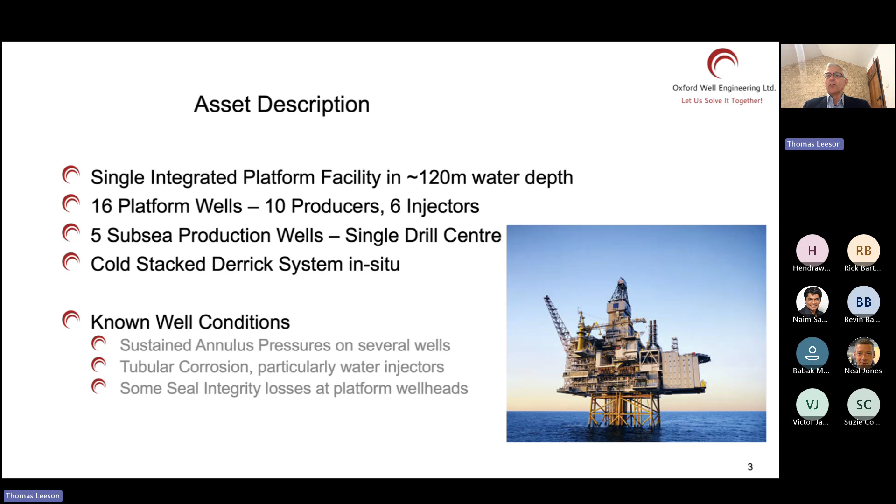And of course, if this is typical for platform wells, one of the things we should be thinking about, well, even if we don't know for certain what's in the subsea wells, do we have any reason to believe that it would be different than what we're experiencing? Of course, it might be. Your metallurgy might be different. The reservoir you're dealing with might be different. But oftentimes the problems that you see with platform wells, we will see with subsea wells as well. We just don't know it yet because we haven't got access to the well.

When we start a project, what have we got? Well, actually, what we should already have is a liability estimate, or what's sometimes referred to as an asset retirement obligation estimate, an ARO. This is a legal requirement because we have a known cost in the future. We know we are going to have costs associated with the decommissioning and abandonment of the field, and therefore the company that's responsible for that must carry that liability on its balance sheet. So we need an estimate of what that liability might be.

And so typically what's done is a simple deterministic estimate. I don't think I've ever seen all the wells reviewed at this point. It's usually a selection of the wells. So for our 16 wells plus the subsea wells, in this particular instance, there were 4 wells selected for a superficial review to come up with a conceptual design of abandonment that we can then put a most likely duration on, and we can have some most likely or reasonable unit costs associated with those activities.

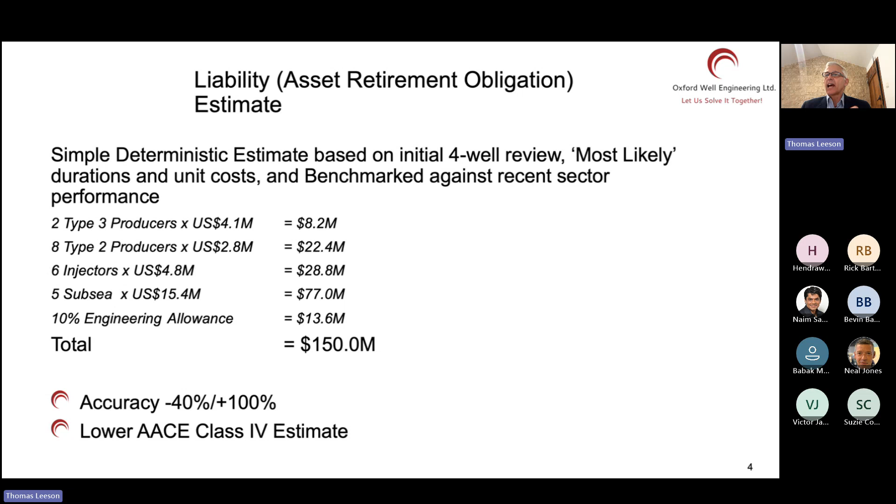So we would still use AACE's recommended practices, and we'd use their template for basis of estimate. But to do a project budget, we really ought to look at each well. Clearly, it's the start of the project. We won't solve all the problems. We won't even identify all of the problems, probably. But we should at least have a look at each well. And as we do it, we should prepare a really comprehensive technical risk register. Every time we have an unknown or an uncertainty, we have an additional technical risk. And we should recognize that, and we should understand what it is we're going to do if that risk turns out to happen, if that unknown or uncertainty and the assumptions we've made around those are wrong.

What are we going to do? And typical things we're talking about: what about when we start circulating and we get losses? What about if we go looking for the cement behind the casing and it's not where we thought it was? Or maybe it doesn't even have a seal. So these types of things that we don't necessarily know until we get into the well, we really need to recognize. This is absolutely fundamental to getting lowest cost.

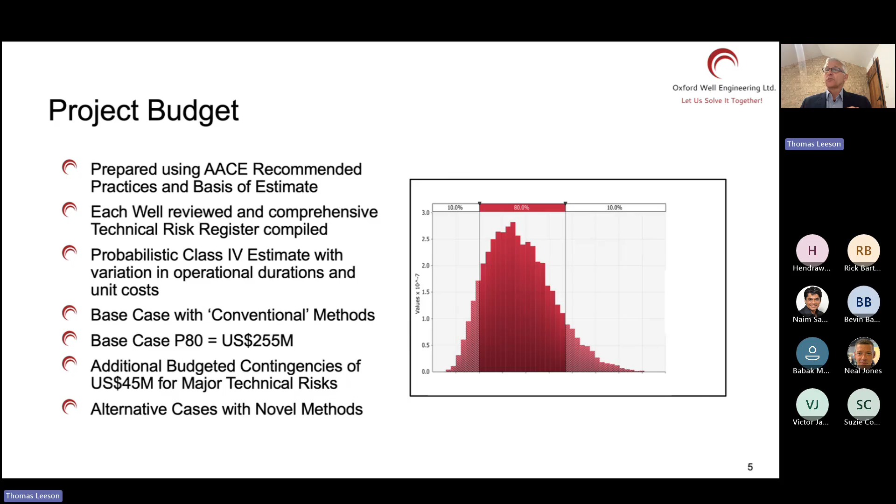While we're doing this, we start to recognize what the alternative cases are that we might be able to use for abandonment, and what novel methods we might be using, but we wouldn't include them yet in the project budget. If we look at the well delivery process, where we're going to go through our gated process, typically assess, select, define, and then execute. This is Oxford Well Engineering's summary of their process.

What I would say, there's two key factors, particularly for well abandonment. One is we should go talk to our regulators. We need to understand what our regulators' expectations are in terms of what the barriers look like and how they'd be tested, how they would be verified, how open are they to us using new technologies, and what extra assurance might they want if we were to do something like that. We need to be very comfortable that we've got a full understanding of their expectations before we start getting into designing the concepts in any sort of detail. So this is an action to take up very, very early in the project.

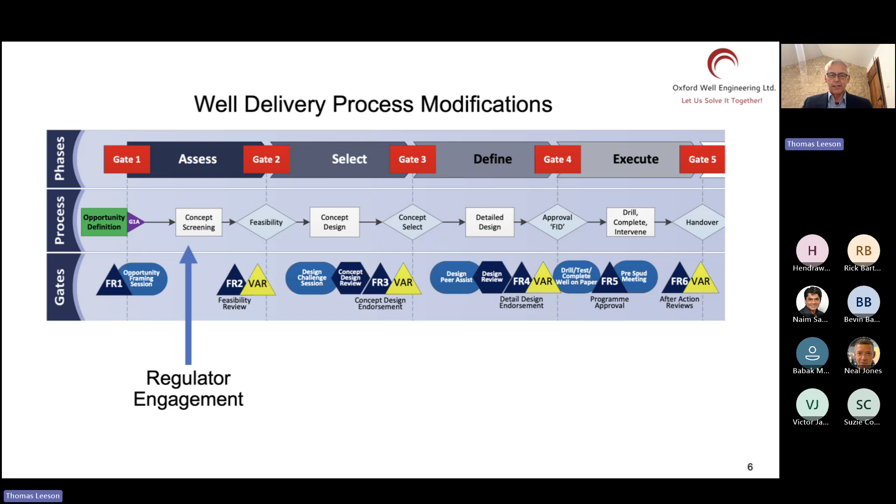In addition, I'd say in my experience, having an independent compliance review when the detailed designs are done is also an absolute key step in the process. There are some areas in the world where this is done with the use of a well examiner, so this is already integrated into the process. But that's not true elsewhere in the world, and I would strongly recommend that people consider this. This is the way to make sure you are compliant.

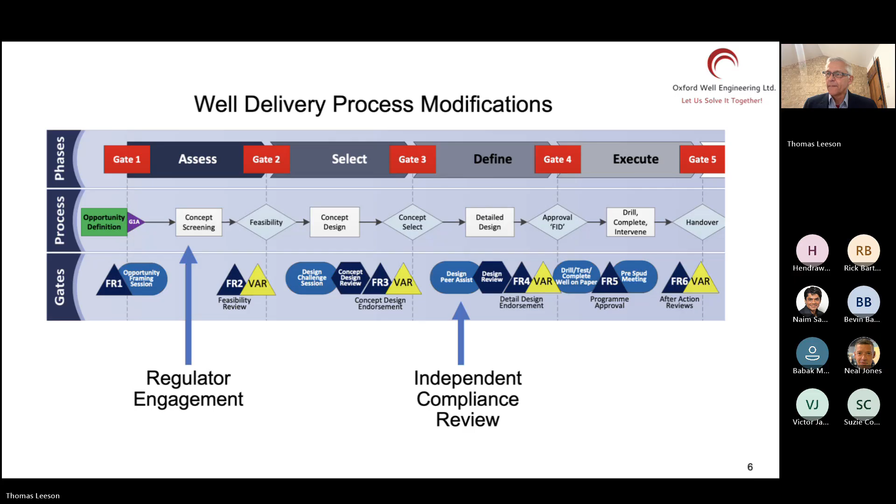But we have to ask, compliant with what? Because in many instances, the regulators do not define prescriptively what is expected, which is good because that means we have flexibility, we have opportunity to take different approaches, to deal with different challenges differently. That's what we want to do as engineers. But then it says, well, how do I know I was compliant? So we have to have a standard. We have to have something to work against.

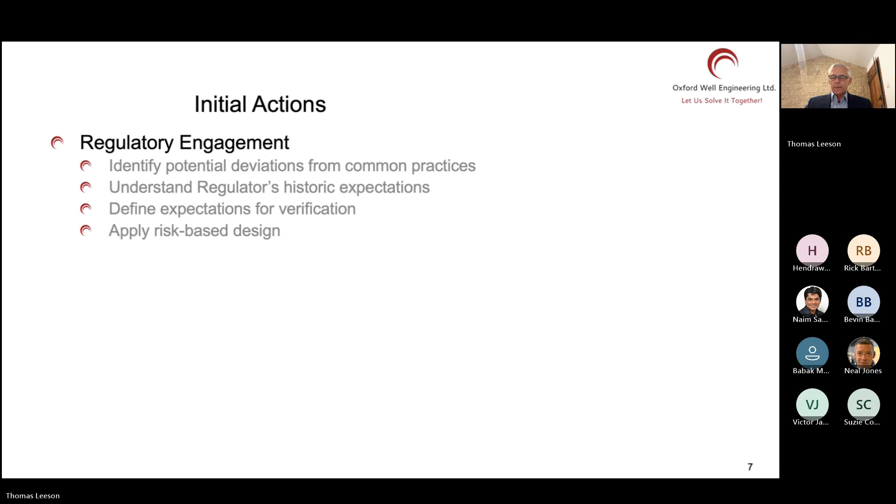And so our initial actions are that regulatory engagement, confirm what I refer to as an abandonment philosophy. We could call this a technical standard, but I don't think the name of the document is really important. What's important is what's inside it. And the key thing that we need to do here is define what barrier options are allowable. What do we consider to be good practice, and are there limits on the applicability of certain options? Can we only use them in certain circumstances?

We also need to confirm how we are going to verify our barriers. So are we purely going to pressure test? Let's say, for example, we put cement in the well. Are we just going to pressure test the cement? Or are we going to collect more information? And of course, that becomes particularly important if you're talking about new and novel technologies and methods, because you want more confidence in them, and therefore you need more verification.

What I would say as well is that at this point, you've also got the opportunity, and I've seen this done very well, to incorporate what I call a risk-based design approach. So if we compare two wells with very different risk profiles, there's an argument to say that for the more challenging well, we work to a more rigorous standard. Now, there's some question marks about that, because you would say, well, why don't we work to that standard all the time, if this has to be as low as reasonably practicable in terms of the risk of loss of containment.

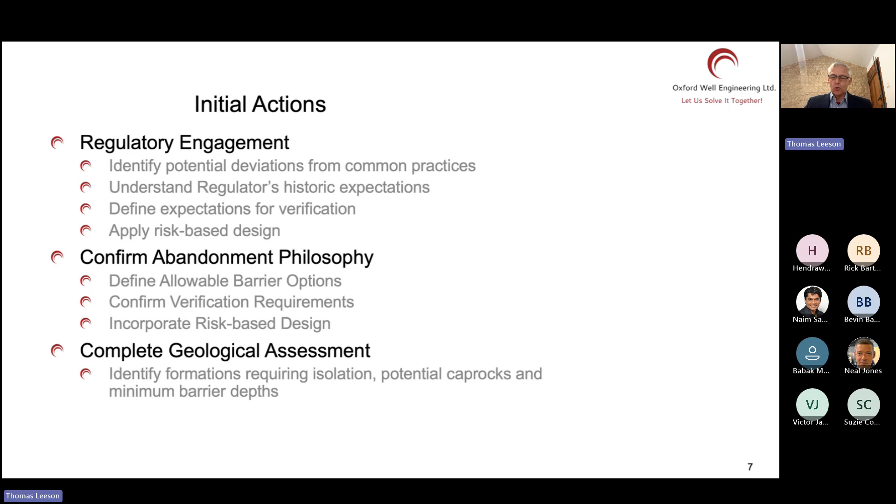And finally, what we should be doing is making sure that we've got a pore pressure plot so that we understand what pressures may be seen in the wellbore. And that then allows us to determine minimum barrier depths, so our barriers are deep enough that the formations opposite the barrier are strong enough, they have enough integrity to manage the pressure differential that they may see in the future.

So very important steps to get that in place first before we start looking in the well and start worrying about, well, do we have cement here? Do we need this there? This is the basics. This is where we start.

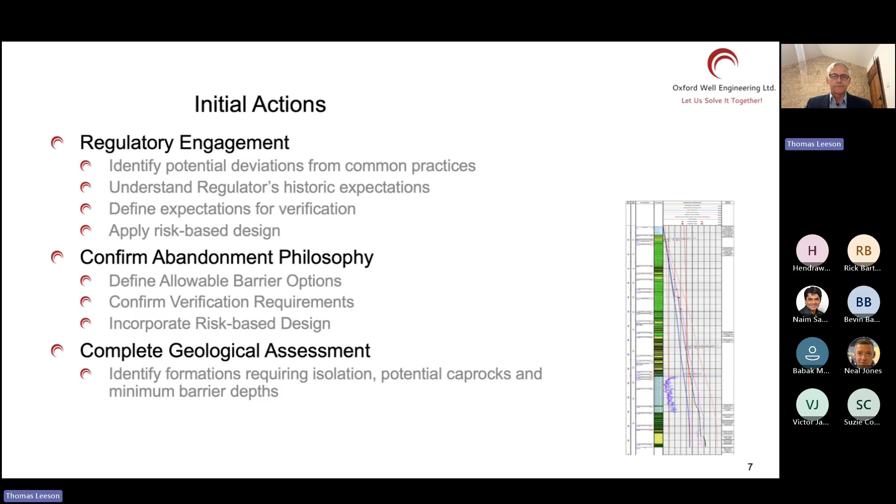Taking a typical project progression. We've talked about a lot of these at the start already, but in here, I would say this is also the time when you go data gathering. Whether that's going to the field and collecting data from the wells, certainly there's some key information that if it's not available, we want to go and get, if we can at all get access to the wells. And of course, again, this is where subsea wells become more challenging because that's so much more expensive. If you can manage without it, you would probably try, and I think that's reasonable.

But platform wells, let's go and find out what's in the annulus. Let's go and find out what pressures we've got and so on. But it also means going back in the archive boxes, going and finding the original end of well reports, going for the daily drilling reports. There's a lot of information in these documents if they were written well and they've been kept.

Sometimes it's not an option. The data's not there. It's gone. The information has disappeared. Particularly when assets have been handed over from one operator to another several times, data leaks out and disappears, especially when it was only on hard copy. But if you can, go and find it out. Well worth digging through all those archive boxes and seeing what you can find.

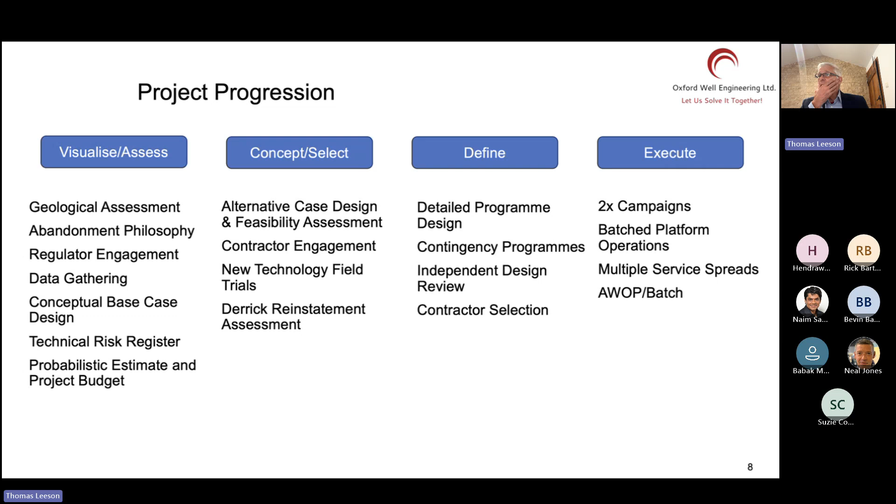Then when we come to do the work, ideally we put it in campaigns of work. And so for this, we would expect to do all the platform wells together and all the subsea wells together, but in two separate campaigns. Give yourself the chance to separate those and focus on the specific challenges in one and then in the other.

But what I would say is very often I've seen what I call batched operations being utilized, so that all the reservoir abandonments are done first. And then we go around the wells again and we do the intermediate abandonments. And then we go around again and we do the environmental plugs if there are some. And then we do the wellhead removal, the conductor removal, whichever is appropriate. Because at each stage, we can have a different spread. And we're only paying for the services that we need.

If we can do the reservoir abandonment, for example, without pulling tubulars, then we can probably do it without a rig. But if we need a rig or a hoist to pull casings in order to do the intermediate abandonment, well, then we bring that capability on site when we need it and then demobilize it as soon as we've finished. So we do all the work with that spread across all the wells, and then we demobilize that and we mobilize the next spread.

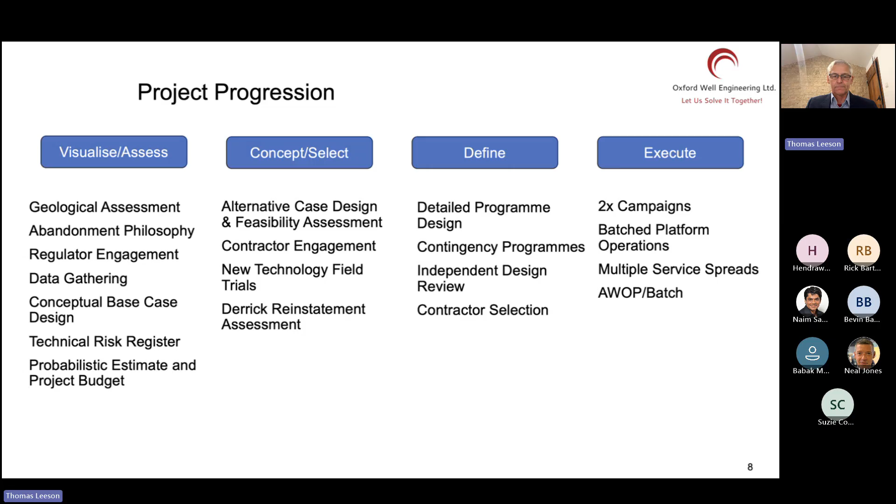So there's lots of opportunities here to get costs down. We have to focus on them. A lot of the effort is put into understanding what other people have done successfully. So reviewing peer practices is a really useful thing to do. Definitely recommend that.

Get with your supply chain, find out what they've got, what's new, what's emerging, where has it worked, where has it failed, why did it fail, what did they learn, and of course, potentially alternative commercial arrangements to the normal time and materials charging. We've got a very defined end goal here in well abandonment, and we should have a very defined risk profile because we should have a really comprehensive risk register.

When you have those two things, lump sum type pricing, pricing for performance starts becoming more interesting, and you're more able to utilize that kind of approach. The more risk that's in there, the more unknowns and so on that are in there, the harder it is for the service sector to give you any kind of lump sum price that doesn't have a lot of extra contingency in it. Contingency that you might not necessarily need to pay for because those things may not happen, but the service company needs to protect themselves.

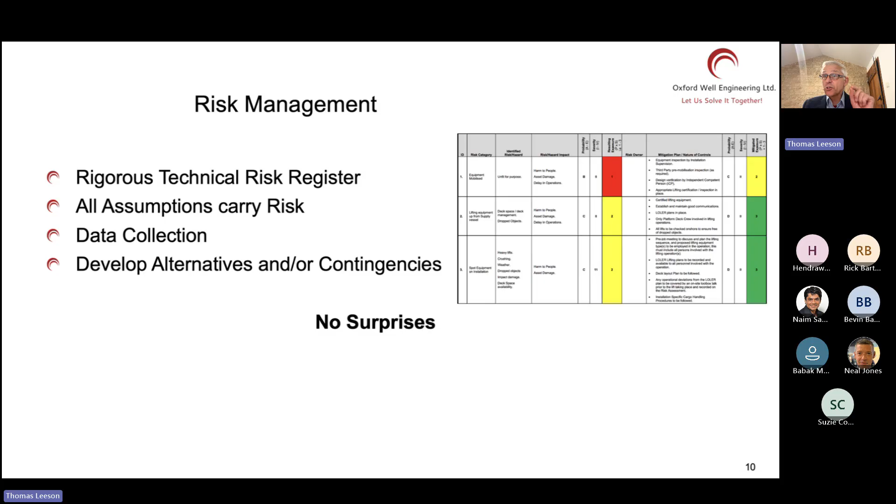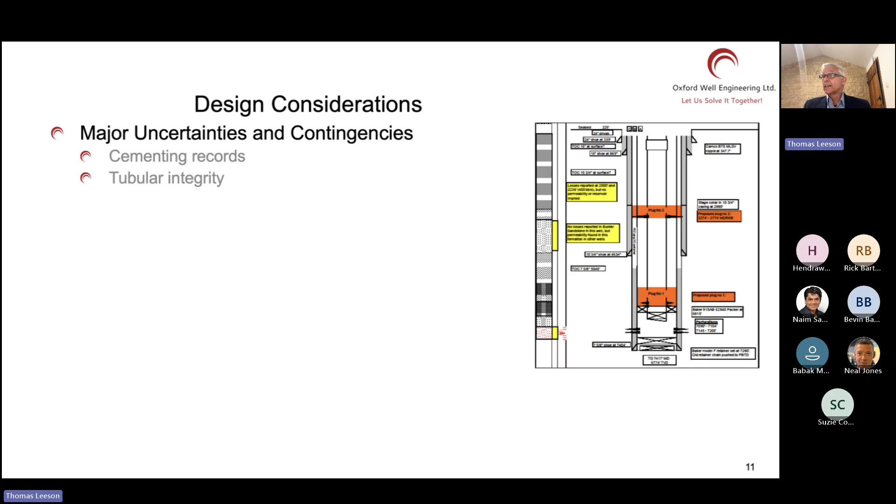These are the things that we really want to know and understand what the consequences might be, and what's our contingency going to be if we get out there and we find that our casing parts, for example. There are some preliminary work scopes that we can get done and will give us information. We definitely want to go out and do a full wellhead maintenance routine. We want our wellheads to be fully ready when we're out there working on them and intervening on the well.

But also, when we're out there, we want to sample all the annuli. We want to understand if we've got gas or liquids in the annulus, if we've got pressure. If we don't already have it, we want to understand the pressure profile and the recovery. Is this pressure coming from a formation? Is it coming from a casing leak? If it's from a formation, where is it coming from?

If we take samples, we can often get a signature composition, which will allow us to understand whether this is coming from our production formations or whether it's coming from somewhere in the overburden. And that's really key to understanding what the challenges will be in the well. We can also do things like fiber optic investigation.

This isn't a service that I've used, but I've seen some presentations on this, and I know one or two people who've used this, where you run fiber optic in the well and effectively encourage the annuli to flow, and you can hear through the fiber optic the flow behind the casing, and you can effectively work out where your flow is coming from, and indeed where it's going. Do you have cross flow between multiple zones, or do you have a formation in the overburden that is delivering you your annulus pressure?

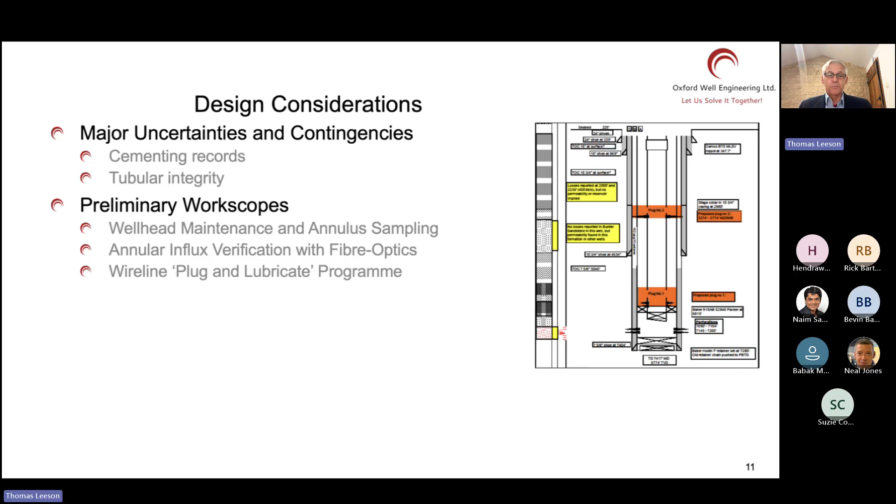So if you're coming with coiled tubing, or you're coming with a rig, or you're coming with an intervention vessel for a subsea well, no, that doesn't make sense, does it, for a subsea well? That would be the wireline plug and lubricate program. Sorry. But yeah, for platform wells, you want the well to be as ready as possible. So go out there with what is effectively a very cheap spread and get as much work done with wireline and maybe a pumping spread before you go on to actually installing the barriers.

Some activities now can be run on coiled tubing, including PWC or perf wash and cement, which is a cementing technique for the annulus. There's several different tools and tooling providers out there now providing that type of service.

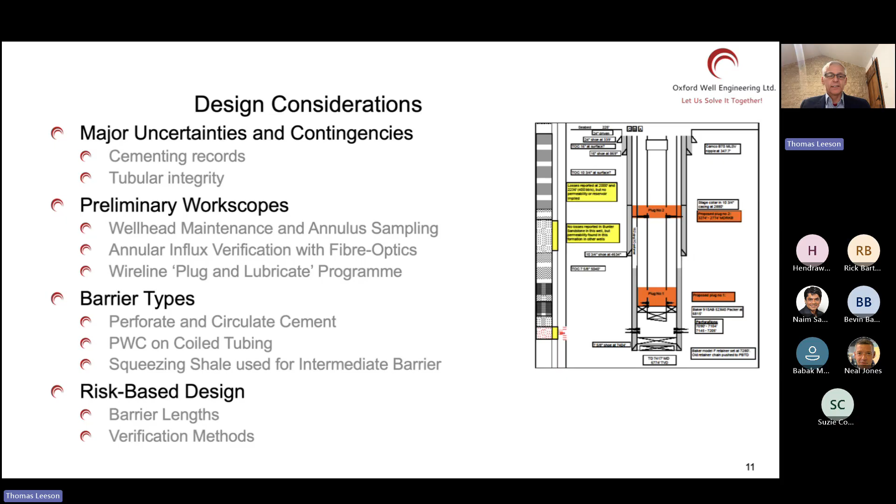There's also verification methods. If you've got lots of information that gives you confidence about where the cement has gone or where the barrier material has gone, and that it's gone off, then maybe there are circumstances where you can say there's a low risk here, and I can minimize my verification methods and maybe not even pressure test the plug, depending on the circumstances in the well and what you've already done in the well.

So heading towards the end now, heading towards the execution bit. Well, of course, if we've done lots of things well by the time we get to this point, we should be in great shape. What we need to do now is manage the operations well, safely, efficiently, logistically, and so on. You can make lots of mistakes potentially in those areas, but I would hope that that's actually the easy bit. That's the bit that we generally do very well.

In this particular instance, with this typical project, the way I've seen platform wells approached: we go out with a wireline spread, kill the well, put our wireline plugs in, then come with a coiled tubing spread to abandon the reservoir, then demobilize the coiled tubing, mobilize the HWO unit, and abandon the intermediate zones, remembering that we're doing this on all the wells.

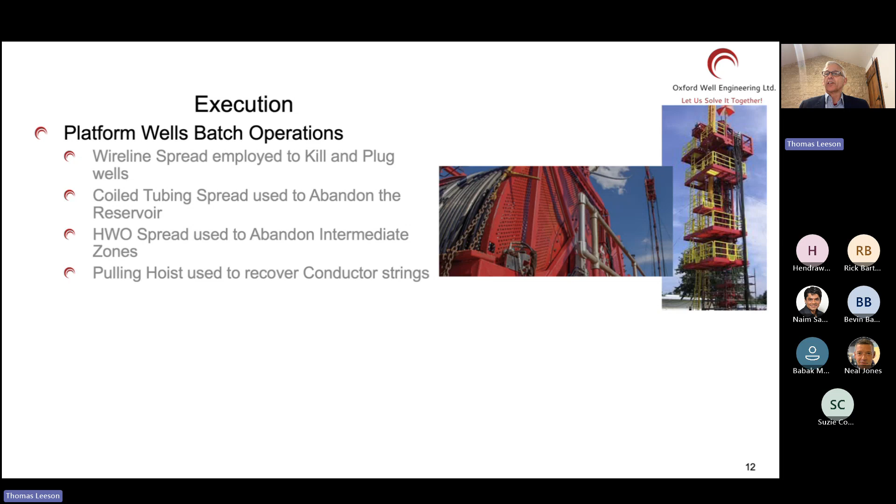So we don't start at the bottom of the well and end at the top and then move to the next well. We hop from well to well to well and come back, and then we do the next stage, the next phase on all the wells and so on. And then in this instance, in the platform wells, we even demobilized the HWO unit and we brought out a pulling hoist to recover the tubular strings, the conductor strings. There's no well control required at this point. The well's been fully isolated. We don't need something as sophisticated as an HWO unit.

Subsea wells, I've seen it makes sense to use an intervention vessel to go and do an initial plug and lubricate, then bring the rig in to abandon the reservoir and intermediate zones. But typically with subsea wells, you'll have an environmental barrier at the top of the casings just below the mud line, and the wellhead will be removed. We don't need the rig to do that.

There are rigless options for putting the environmental barrier in place that can be deployed from construction vessels, much cheaper spread rate, much quicker operation, and the wellheads can be cut and recovered very quickly. There are many service companies doing that kind of work, so lots of opportunity to do things differently and release the rig. Try and get your spread rate down at every opportunity.

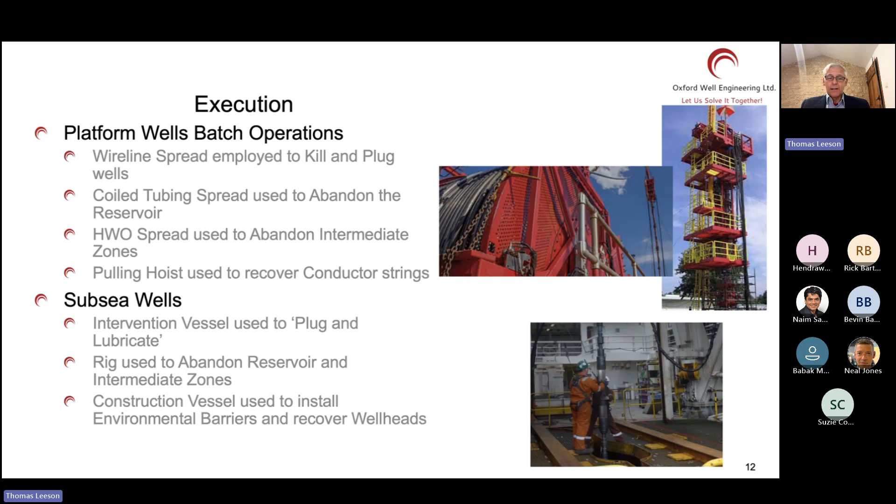So what would our likely outcomes be for a project like this? Well, if we've taken this approach, we would certainly expect to have regulatory acceptance, and we expect to have compliance with our standard. It's not unusual to be able to deliver significantly under the initial project budget if the initial project budget was done the way I propose. I'm suggesting here that 30% is quite a reasonable number.

So we were talking in the region of $170 million, plus some of the contingencies were needed because some of those risks did materialize, and we had to spend that extra money. So we came in at 195 million. Well, given that our original estimate was 150 million minus 40 plus 100%, we're definitely in that range. We started out at 255, and we've delivered significantly under budget.

What I would say is a lot of that comes from being able to deliver operations efficiently, and typically see something like a 40% reduction in the time per well over the first 4 or 5 wells. That is doable. After that, it becomes a lot more difficult to get the improvements. But initially, in that initial period, focusing on efficiencies, getting the crews involved in what makes sense, what needs to be ready next, which order should we do things in, really, really useful and a real good cost-saving area.